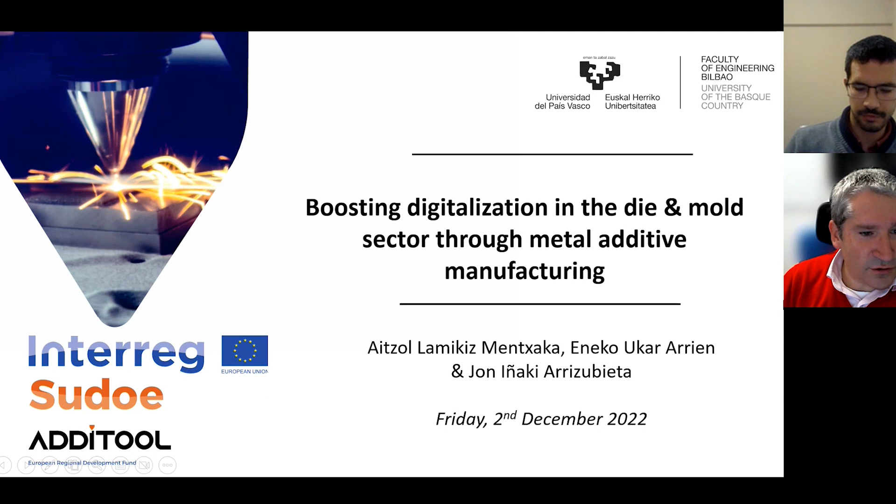So once we have finished the presentation, let me start. Here you can see the content of the presentation. We will start with a very brief presentation of our research group, and also a brief introduction of the metal additive manufacturing processes that we are researching. Then my colleague Iñaki will go on with the more technical aspects about the Die&Mold industry and the application of metal additive manufacturing, and we will try to finish with some conclusions. Please feel free to ask as many questions as you have, we will also be on the chat, so you can write your questions there. So please, Iñaki.

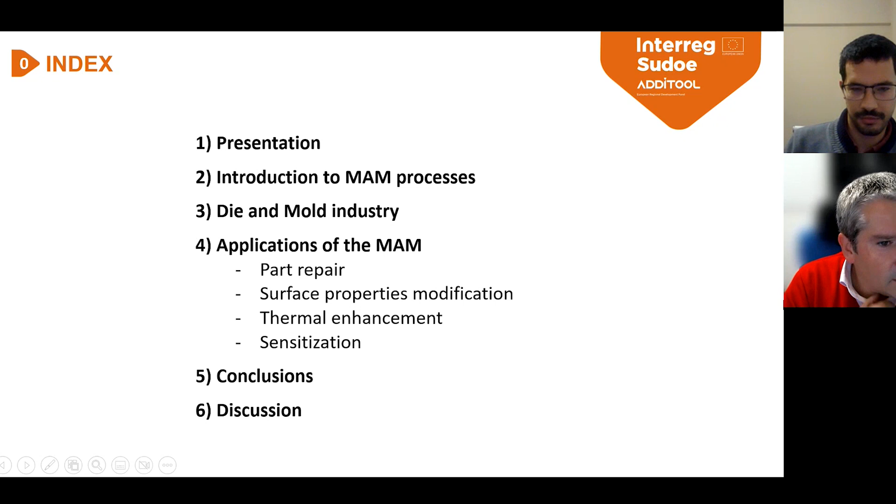We are from the University of the Basque Country. Our research group is the High Performance Manufacturing Group, which works in different areas: high-speed manufacturing, grinding, electro-discharge machining. Also, some years ago we started a research line in metrology and inspection, and we are focused on laser material processing, mainly additive manufacturing, laser welding, and laser texturing. We are in the Faculty of Engineering of Bilbao, working with students. We lecture in Bachelor Science, Master Science, and also PhDs, and we develop different TRL level projects, from quite basic to technological transfer projects.

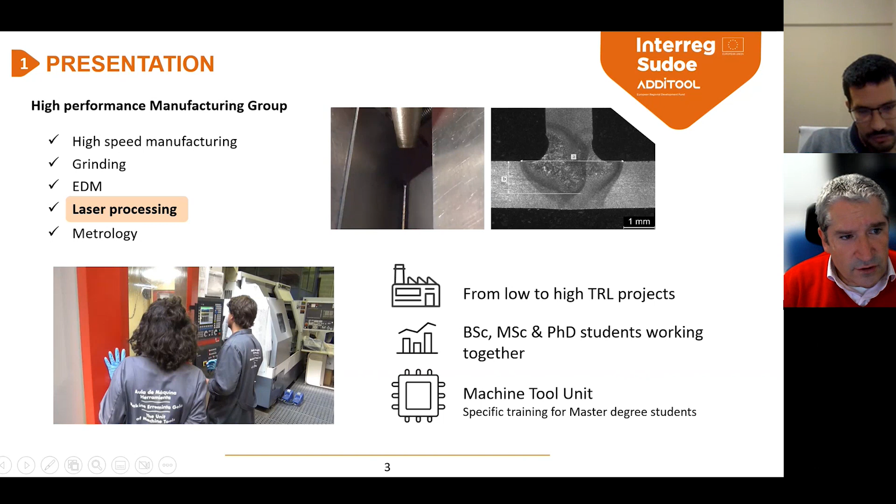We also have another workshop called the CFAA, Centro de Fabricación Avanzada en Aeronáutica, which you probably know. Here we also have some additive manufacturing systems; in fact, the laser powder bed fusion process that I will talk about later is located here with two systems. Here our projects are more high TRL level focused, we work mainly for companies but also develop some PhDs here too, so we combine both training and research activities.

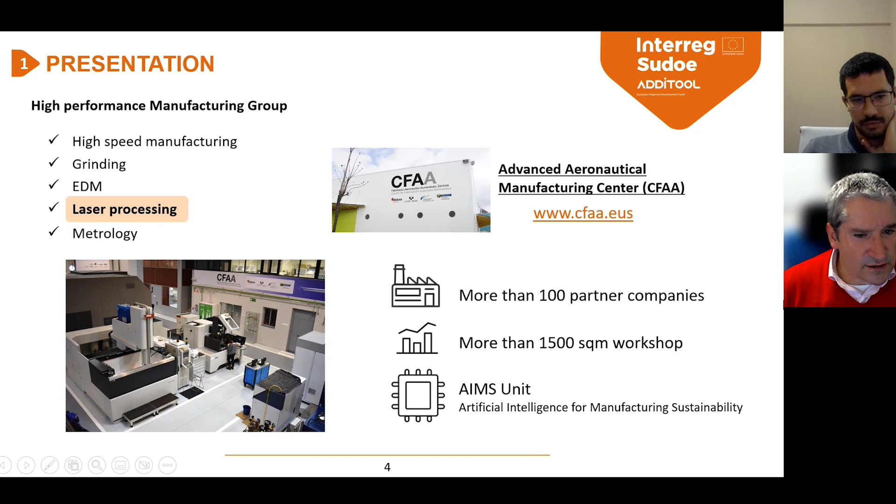Focusing on our research activities in laser material processing, the main technologies we work on are powder bed fusion and directed energy deposition, both metal additive manufacturing, plus some laser texturing and laser welding. Our main areas of research are process modeling, monitoring, control, CAD/CAM, and surface engineering, so any activities related to the manufacturing process. We are very focused on different sectors like aerospace, Die&Mold, automotive, and energy. More specifically, this webinar will be dominantly located in laser directed energy deposition, which is the main technique we have used here, and we will focus on monitoring and control, surface engineering, and some process modeling. Obviously, in the ADDITOOL project, the sector is Die&Mold, and some automotive.

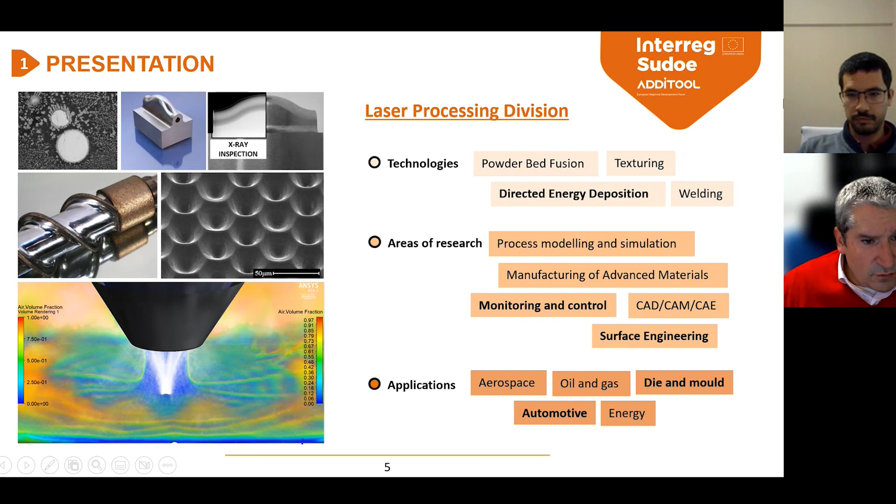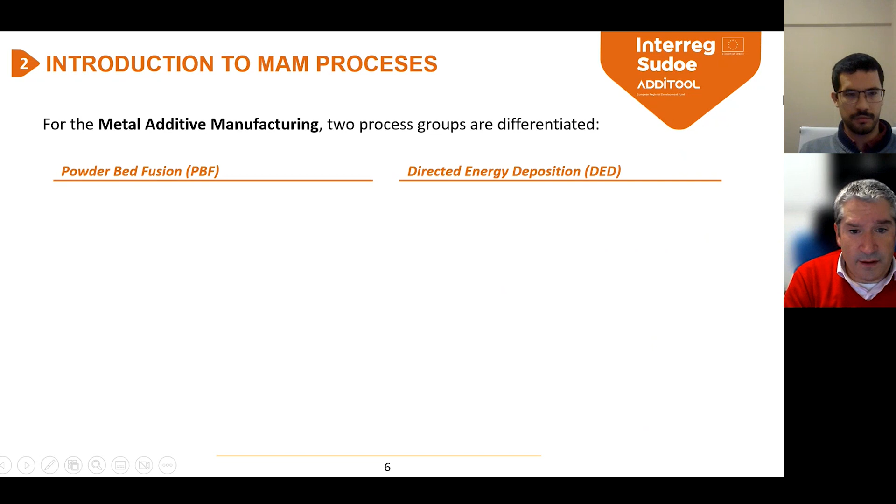Going to the introduction now, we have focused on two metal additive manufacturing processes, which are probably the main processes used for metal: one is powder bed fusion, and the other is directed energy deposition.

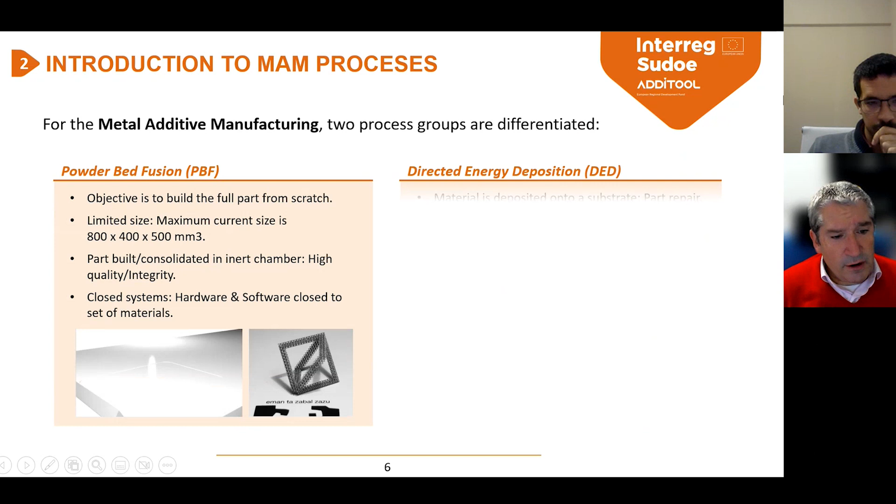Probably you will know them, but in short, powder bed fusion is used for building parts from scratch, from zero. The idea is to go layer by layer to build a full part. The process is carried out in an inert gas chamber, usually argon.

So here we have a first limitation of the process: since we have to insert the part into an inert chamber, the part size is limited. A very big powder bed fusion machine can be 800 by 400, 500 millimeters in height, but conventional ones are typically 300 by 300 in XY and 300 to 400 millimeters, which is considered relatively big for powder bed fusion.

On the other hand, we have directed energy deposition processes. In that case, the idea is not to build the full part. We start from a previous part, from casting or forging, and deposit material by injecting it onto a substrate. This process is very useful for coating a surface, even part repair.

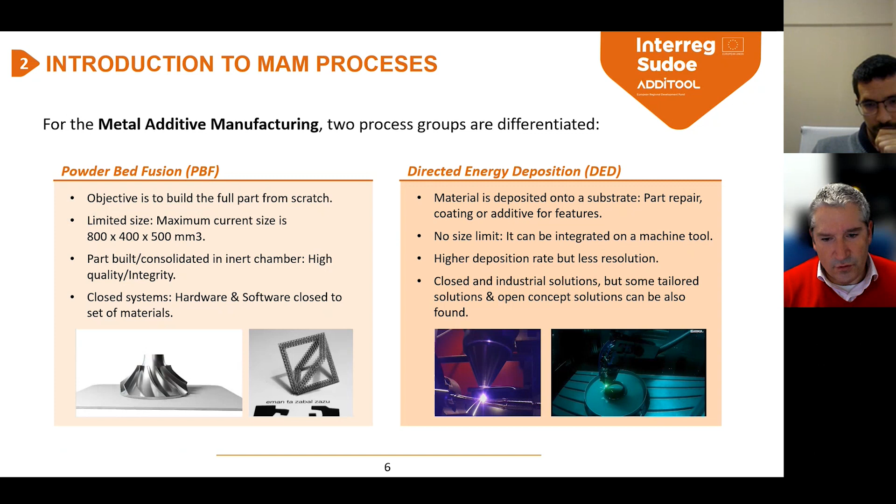Going more in detail into laser powder bed fusion, the idea is to go layer by layer using metal powder. The system spreads a powder layer. In that case, we use quite fine powder, relatively small, lower than 60 microns.

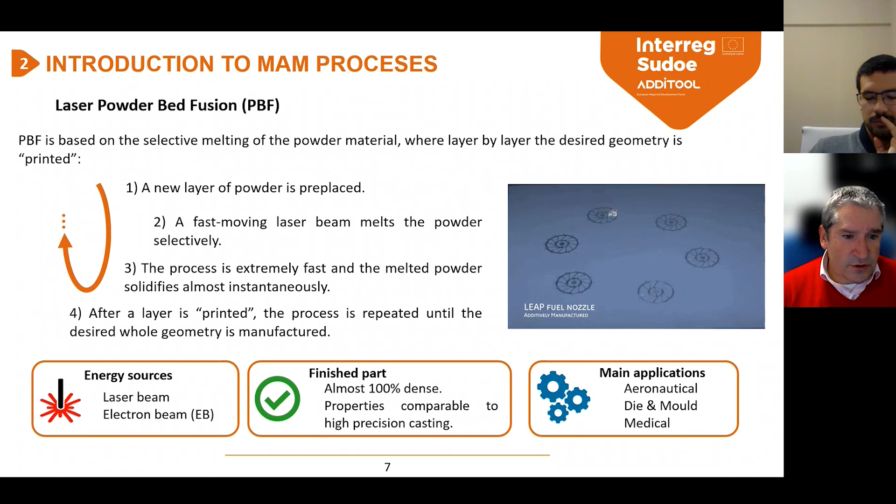We need to fill the whole plate with powder, and with an energy source, typically a laser, the laser melts the powder that will become the part. The melting and resolidifying of the melt pool becomes solid material. The process repeats layer by layer, in layers of about 30 to 60 microns, building a sequence of layers to form the full part.

The typical energy sources are laser beam, and there are also some systems that use electron beam. It's not so typical, but electron beam gives us a little more energy and goes a little faster using higher-grain powder. On the other hand, the resolution and finishing quality of the part are not as good, so both techniques coexist.

The process gives us a very good quality part if the process conditions are well selected, and we can obtain almost 100% dense parts, comparable to high quality castings. The main applications now are medical, for example dental implants. Aerospace industry is also moving fast, introducing this technique with a lot of developments. Die and mold is also one of the key sectors, since additive manufacturing is very good for complex geometries, internal cavities, and so on.

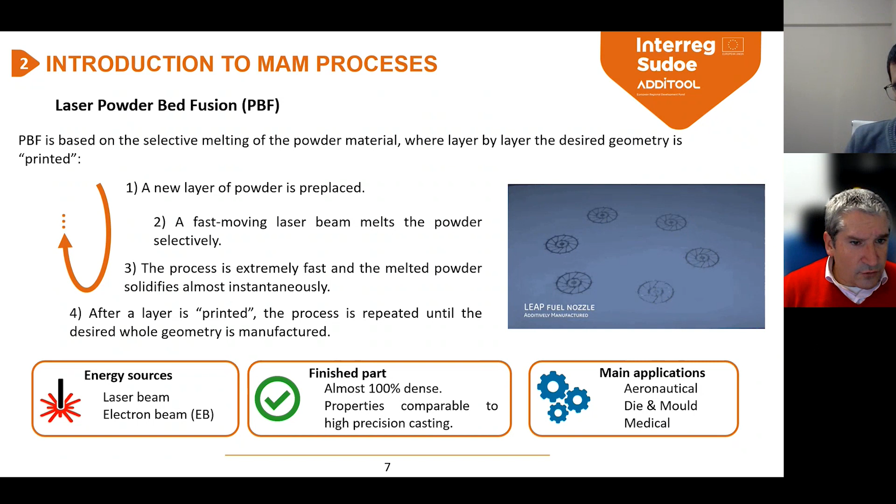On the other hand, the other process, directed energy deposition—here you can see in the video—the idea is that with a system, in this case a nozzle, we inject material. It can be both in powder or wire form, in combination with an energy source that can be a laser. We melt a substrate, a previous part, and then inject the material into the melt pool created in the substrate.

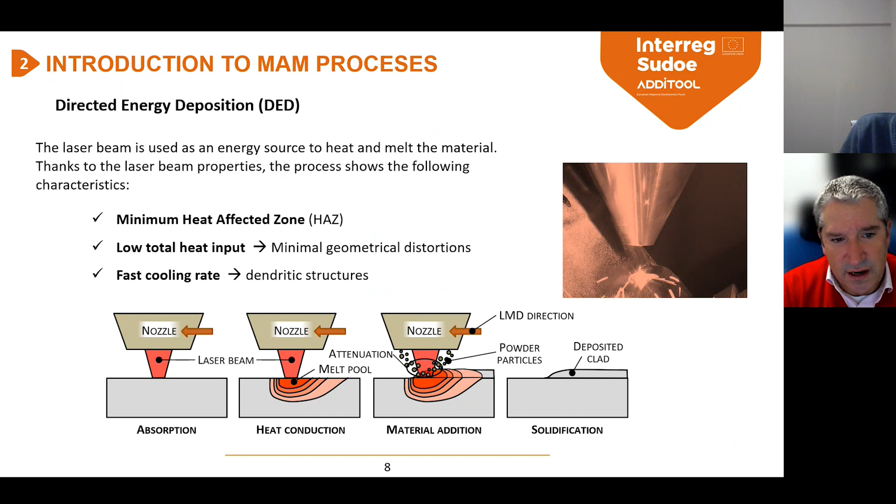So we can inject and deposit material in an area, and by overlapping the tracks of the material deposition in a layer, we can coat a surface, and even go layer by layer in order to build up material. Here you see an example of a layer by layer sequence that we have built as a feature.

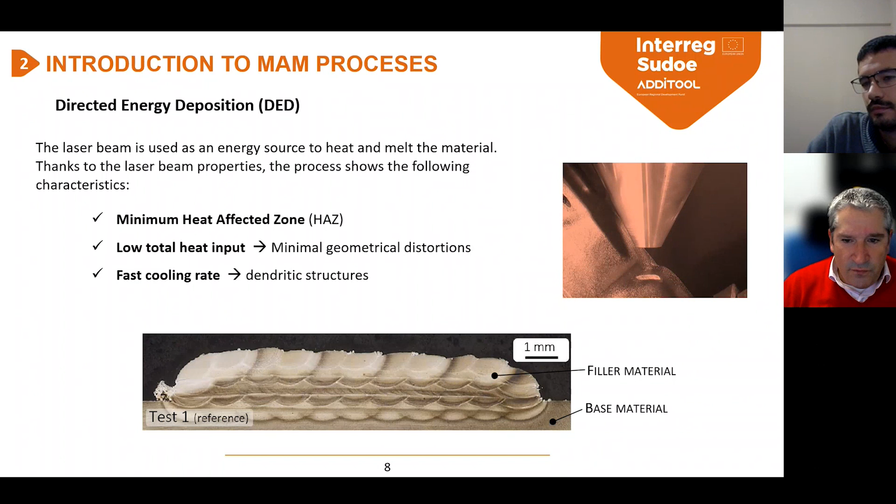In that case, the laser gives us very good quality in terms of having a minimum heat affected zone, and we can melt a very local area. So in that case, we have a very good resolution. And also, if the process goes with the correct conditions and good parameters, we can obtain a very full dense and very good quality in the deposition of the material.

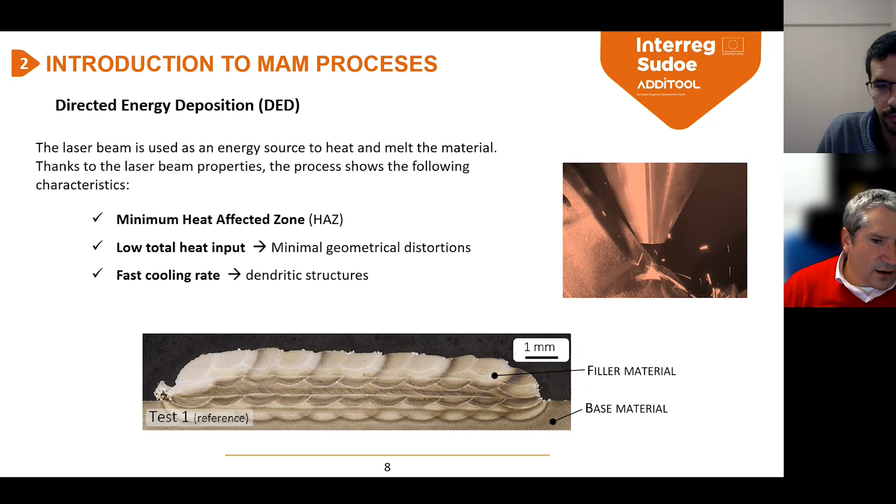So, just to finish that, in comparison, here you can see both techniques. On the first hand, the laser powder bed fusion, we have a relatively good accuracy, considering that it's a thermal process with metal fusion. We can obtain parts below 0.1 millimeters, so it's quite good. Surface roughness is also quite good, above 2.5 microns of mean roughness, which some people could consider not very good quality, but if we consider that it's a thermal process, it's relatively good. We obtain very good integrity in the parts because of the inert gas chamber.

On the other hand, we have some restrictions. For example, the building rate is not so high. We have 0.2 to 0.4 kilograms per hour, which is not so much. And on the other hand, we have size restrictions due to the inert chamber. So if we go to very big parts, it's not affordable.

And on the other hand, the laser directed energy deposition, in that case, we do not have so good quality in terms of surface finishing and tolerances. Here it's very difficult to obtain tolerances below 0.5 millimeters; 1 millimeter can be the process limit. Surface roughness is also not so good. So in this case, we will need almost 100% of the times to finish with further machining or grinding operations.

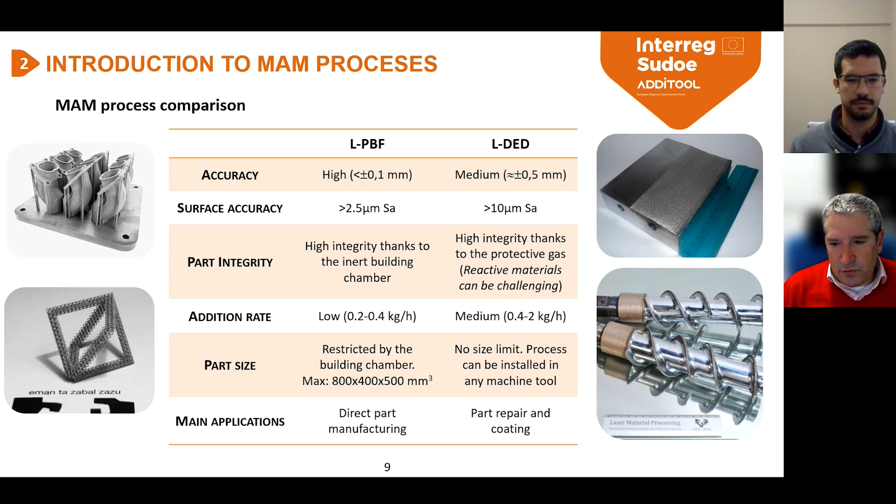In my case, I'm going to start directly talking about the Die&Mold industry. As you know, this is a sector formed by different processes like hot stamping, metal blank sheet stamping, and also forging. But in all of them, we can say as a common characteristic that a metal sheet is formed mechanically from an initial to a final shape, which is the objective of the process.

And somehow we have identified some typical problems in all those processes, which are wear problems because of the friction between the blank or the part and the tool faces. Also thermal issues in case of hot stamping because of the high temperatures developed during the process, which may decrease the properties of the tools or also generate abrasion problems. Also, for hot stamping, we have some design limitations due to the geometry of the cooling channels, which are typically manufactured by drilling, and somehow their shape is restricted, always straight. And finally, we have also identified a lack of process data directly in the forming area.

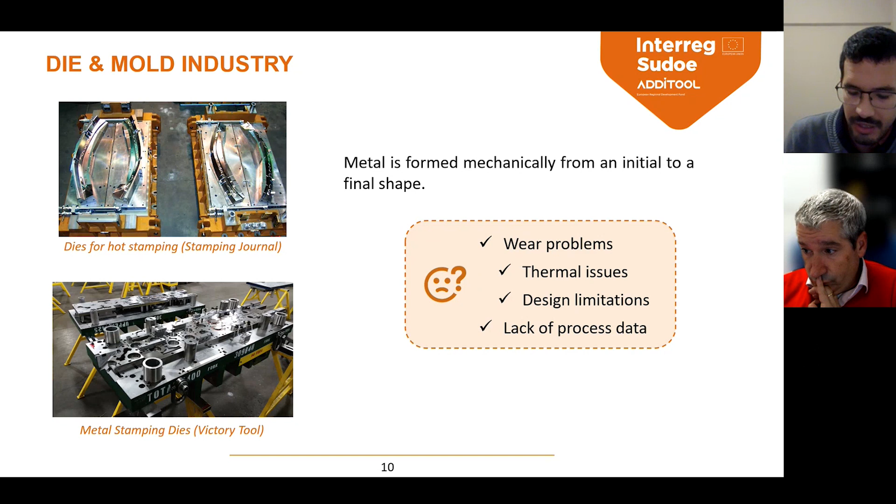We have also analyzed the actual state of the art of the Die&Mold industry, somehow what we expect from this sector in the near future. And we conclude that there won't be many changes, as all the Die&Molds will continue being manufactured by casting and machining. But we have also found that there are some useful applications for metal additive manufacturing that can make a difference in the process.

First of all, we need to highlight that the manufacturing process of a die is rather long. It starts from the design process. Afterwards, we have to cast the material. Afterwards, machine it, and that process can take a couple of years.

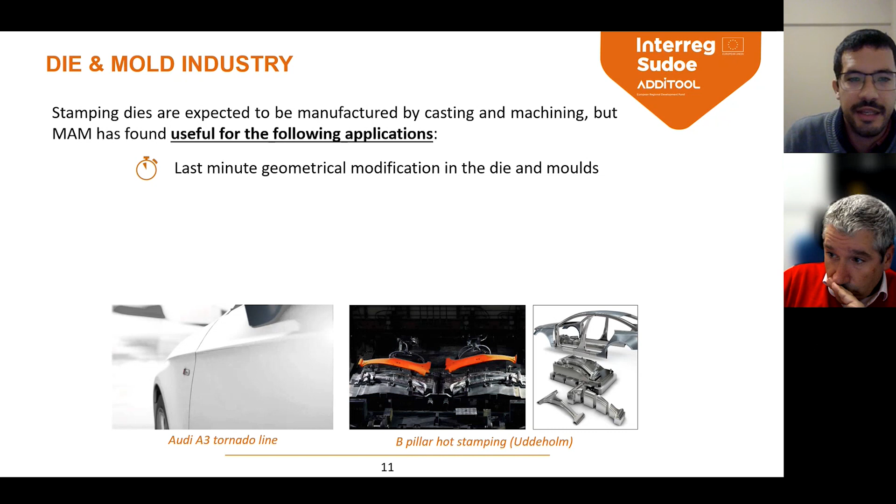During that process, any geometrical change of the tools or the design of the car can also change the shape of the active faces of the tools. In case that modification implies adding material, we will have huge problems in terms of cost and time. So additive manufacturing can add these geometrical details and save a lot of time and money for the industry.

Also, critical areas that suffer wear problems could be repaired by additive manufacturing. Any error during the machining process, like a tool that breaks during milling or a wrong program trajectory, could be corrected by additive manufacturing. Finally, during the adjustment process, which is usually done manually by removing material, if instead it's required to add material, additive manufacturing could solve these problems.

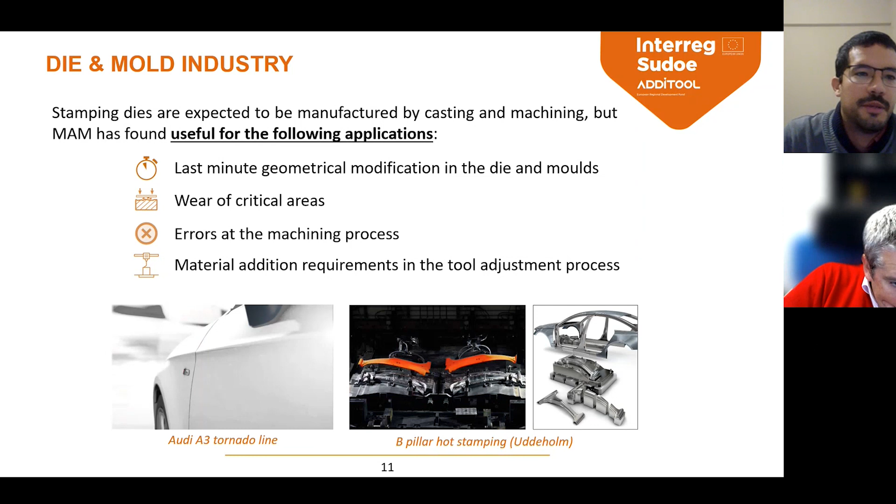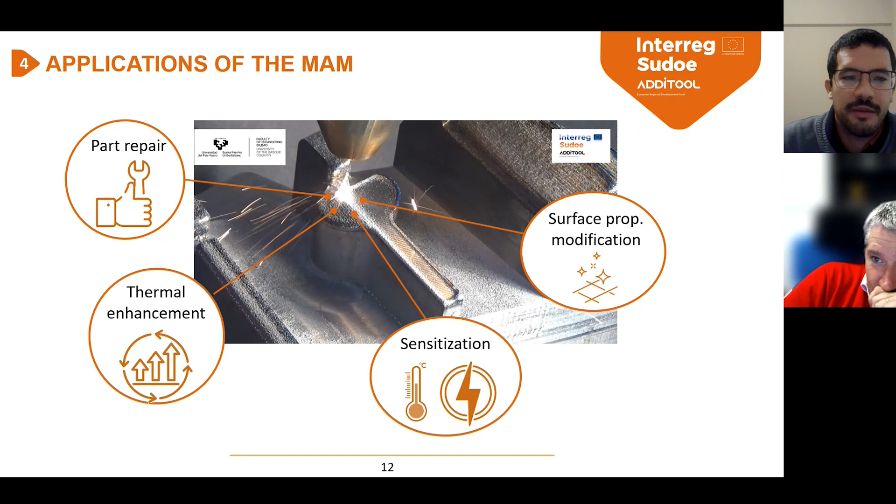Once we identified the possible applications of additive manufacturing for the metal industry, we focused on 4 cases: part repair, thermal enhancement, sensorization of the tools, and surface properties modification. In the next slides, we are going to show you a couple of examples of these applications that we worked on in the ADDITOOL project.

The first of them, part repair, presents different opportunities. On the one hand, the most logical one is that metal additive manufacturing can repair a damaged or worn surface, extending the lifespan of components, which helps achieve sustainable development goals.

On the other hand, we can also manufacture what is called a bimaterial tool. Instead of building the whole stamping tool with the same good, hard, expensive steel, we can combine two steels: one cheap and easy to machine for the bulk, and then deposit a layer on its surface to increase the properties and ensure proper working of the tool.

And also, the final opportunity offered by metal additive manufacturing is the last-moment geometry modification, about what I have already told you before.

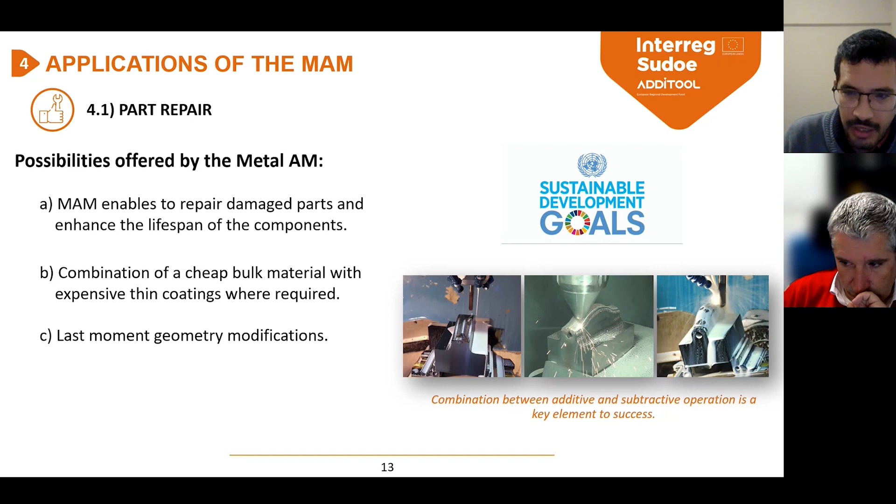So, to give one example for part repair, this is a case study we manufactured within the ADDITOOL project. This is a clamping device in which we position a stamped part, and we use it to check whether the stamping process has been properly manufactured.

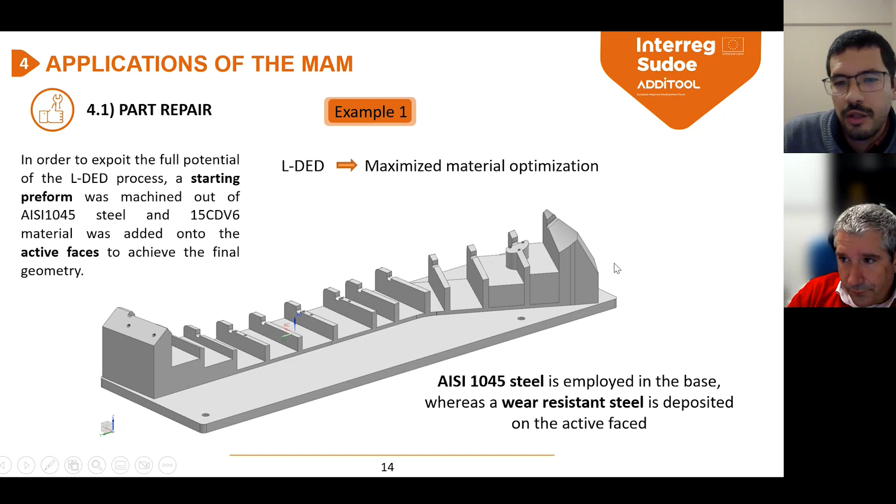Traditionally, this part was built in 15CDV6, an aeronautical steel, quite expensive and not easy to manufacture or work with. Instead, we tried a new strategy: building the base in AISI 1045, a common, cheap, easy-to-manufacture steel. Then we eliminate 1 millimeter of material in the active surfaces and fill it with the good 15CDV6 material.

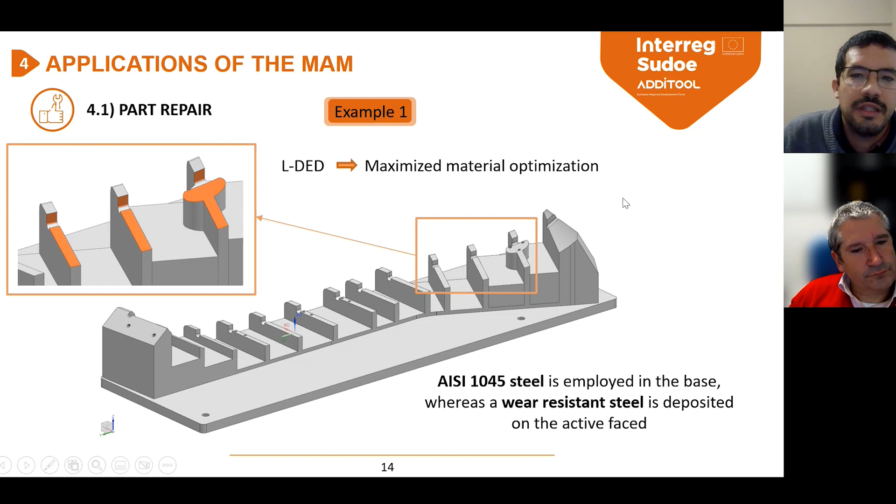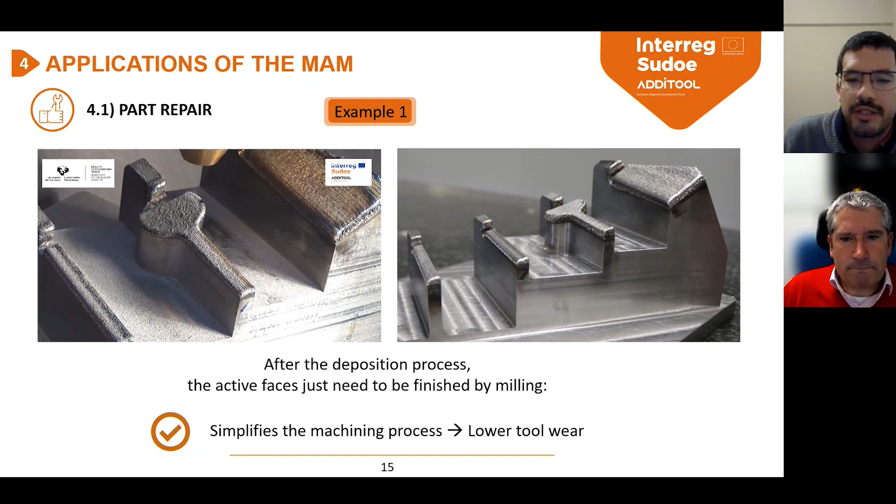On the image on the right, you can see the final shape of the repair tool. One of the main benefits of this strategy is that the final machining process only consists of some small areas, which simplifies the machining process and also lowers the tool wear it suffers.

The second application is related to surface properties modification. Traditionally, when we think about the additive manufacturing process, we always think of the filler material, which in the present case is in powder shape. We introduce this material into the powder feeder.

In our case, it's a gravimetric powder feeder. We introduce the powder inside, it falls down thanks to gravity. We have a rotary plate, and by controlling the velocity of rotation, we control the feed rate of the powder that comes from this pipe to the nozzle, and we inject it into the melt pool in order to obtain a clad made with material A.

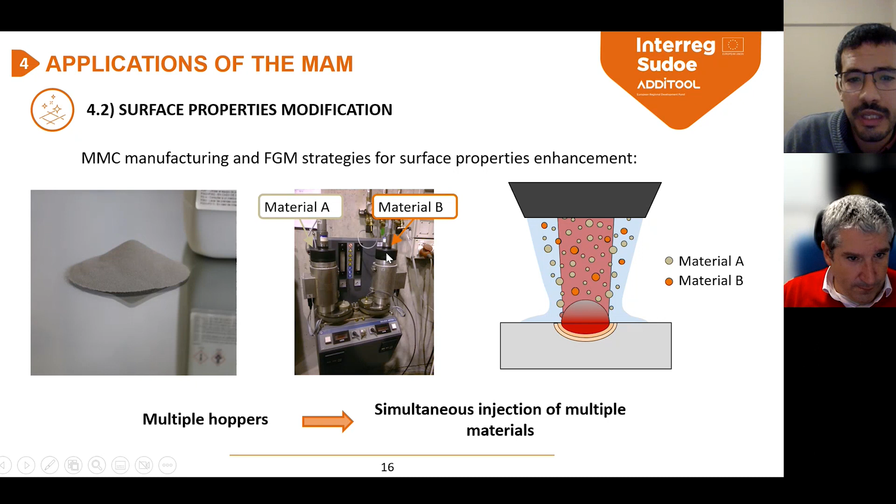However, in metal additive manufacturing, we can combine different materials to obtain what is called a metal matrix composite. In this case, we add two materials simultaneously, and the clad consists of a combination of both. Moreover, we can control the feed rate and ratio of each, building what is called a functionally graded material, controlling the chemical composition of the clad and varying it in every layer.

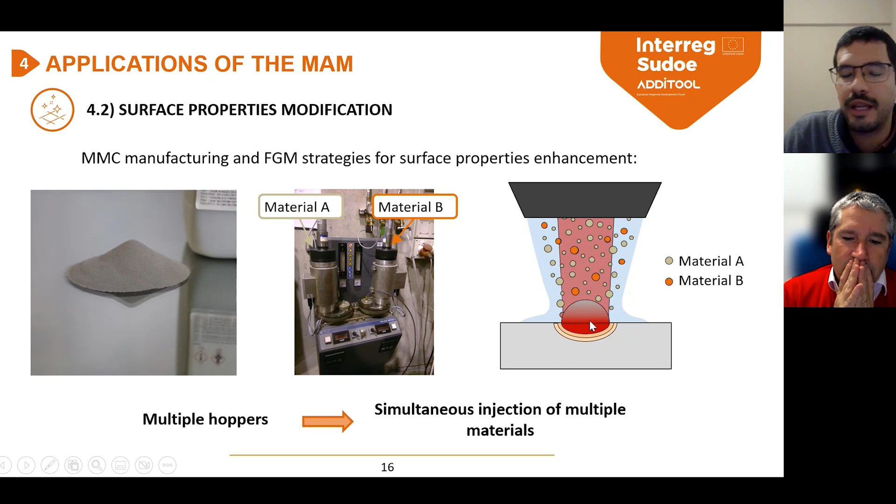In order to show you an example of this metal matrix composite, I can show you a couple of pictures of a Stellite 6 and tungsten carbide deposition. The Stellite 6 is a cobalt-based, wear-resistant alloy.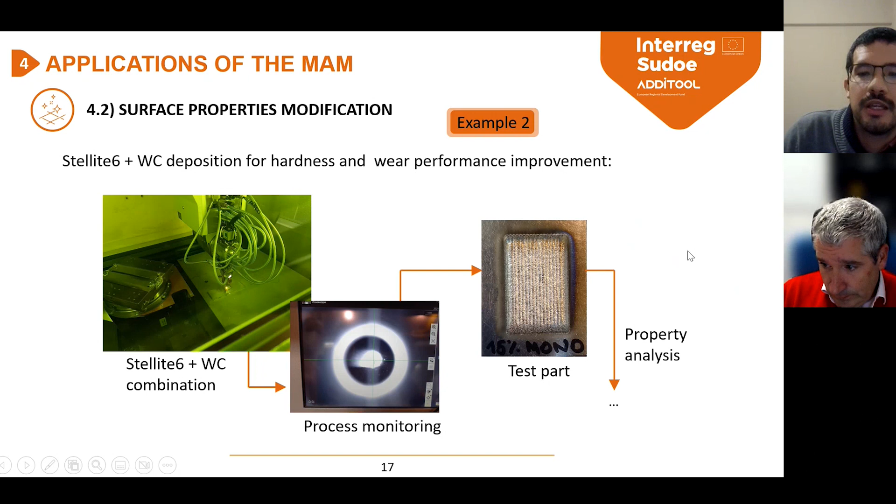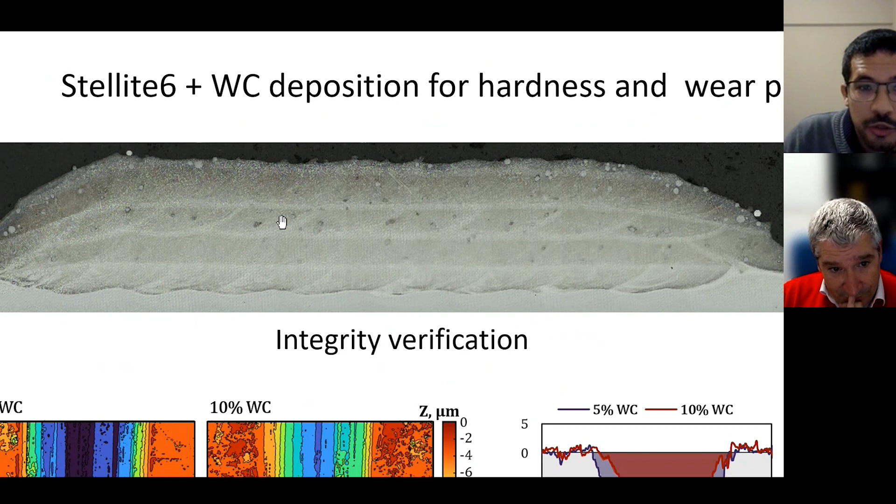In this case, we performed the test in the CFAA, the High Performance Center I told you about before. We build small test parts and analyze them. First of all, we perform an integrity verification. As you can see in this picture, we have the Stellite matrix, which is the metallic matrix, and the discrete tungsten carbide, which are ceramic particles embedded or introduced inside the clad.

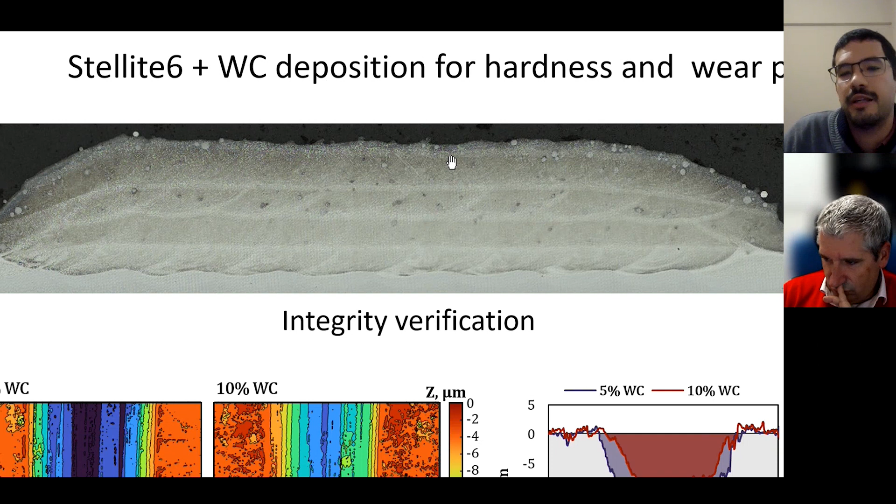This test was performed using the FGM strategy, because we vary the composition of each layer. First we start adding only Stellite 6, then we introduce also 5% tungsten carbide, 10%, and in the last layer we can go up to 15% tungsten carbide and 85% Stellite 6. That way we avoid crack problems and increase the resistance of the coating.

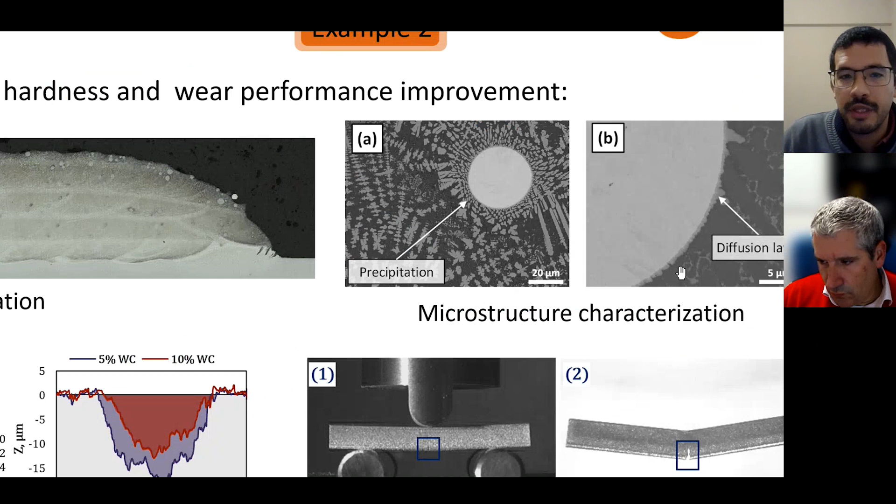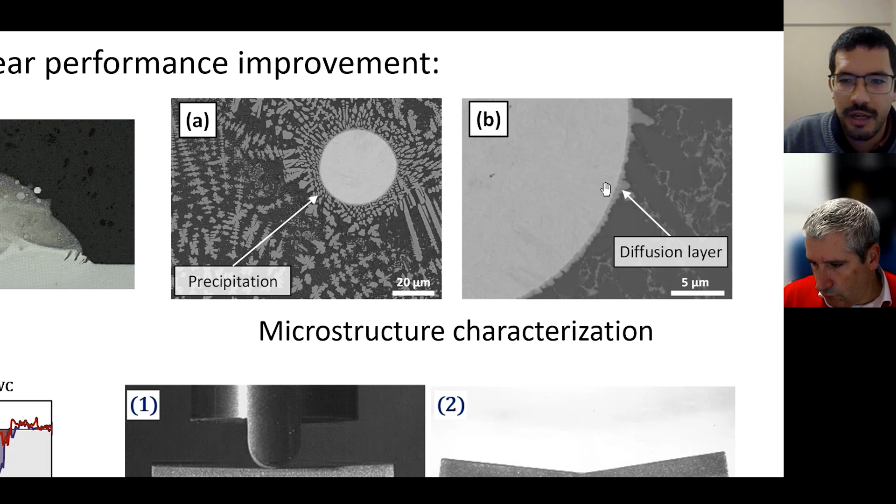Also, as we have a metal matrix composite, we perform an evaluation of the bonding between the tungsten carbide particles and the metal matrix. As you can see in the right figure, there is a small diffusion layer, but it's so small it doesn't affect the properties of the Stellite 6 matrix. This diffusion layer also ensures proper bonding between the tungsten carbide and the metal matrix. So once we have ensured the integrity of the clad, we have analyzed the performance.

Both mechanically, through the three-point bending test, and also the wear performance of this clad. As you can see in this figure, increasing the tungsten carbide percentage implies higher resistance to wear problems, which is really interesting, for example, in the tool and die industry.

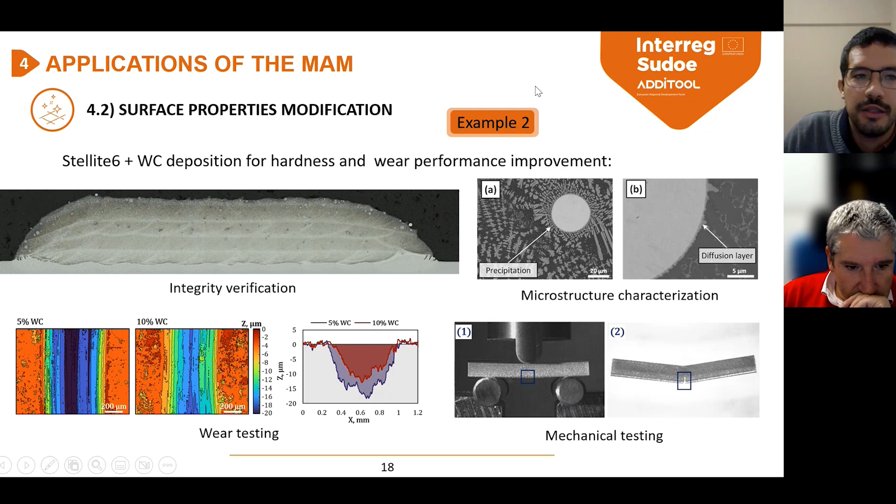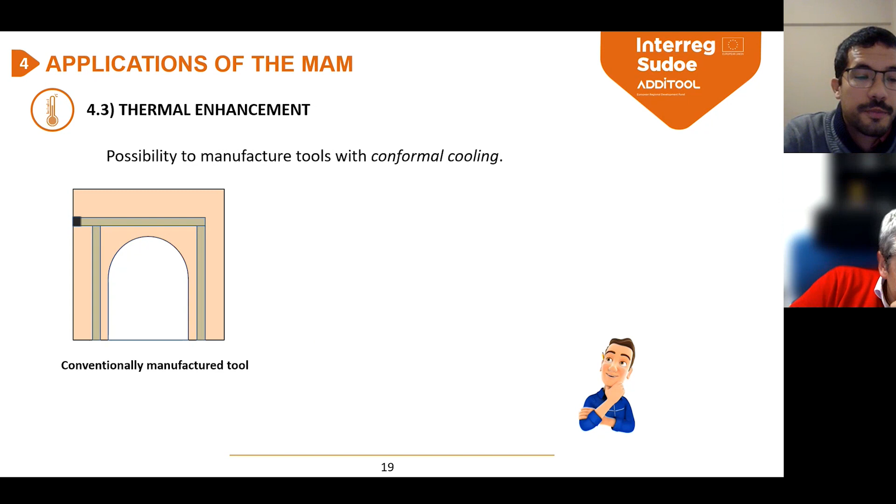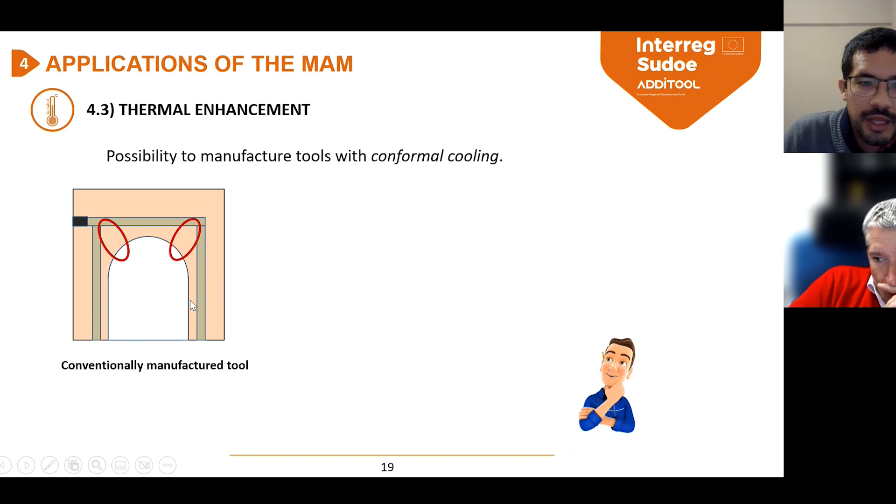The third example we are going to analyze is thermal enhancement. In this case, if we want to manufacture a hot stamping tool steel, we need to manufacture via drilling the cooling channels, which are always straight shaped. This implies that the distance between the active face, the inner line here, and the coolant channel is not constant, and we will have hot spots where heat is not extracted, as well as areas where the drilling hole is close to the surface.

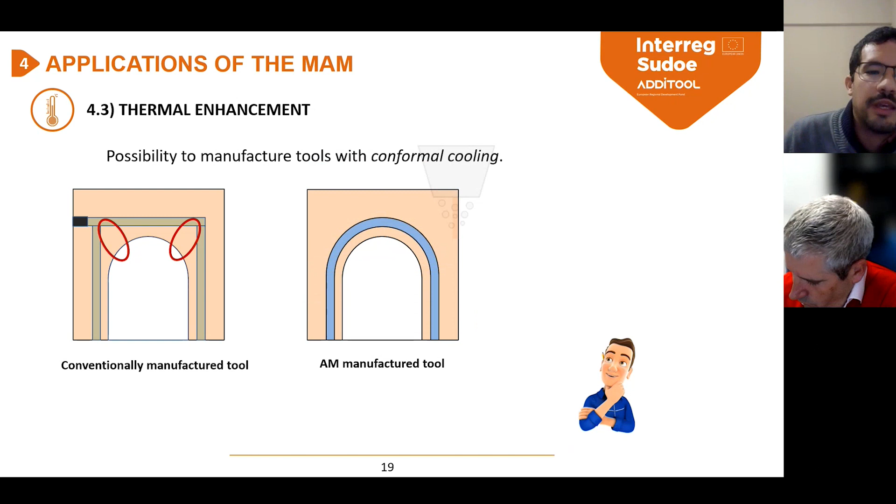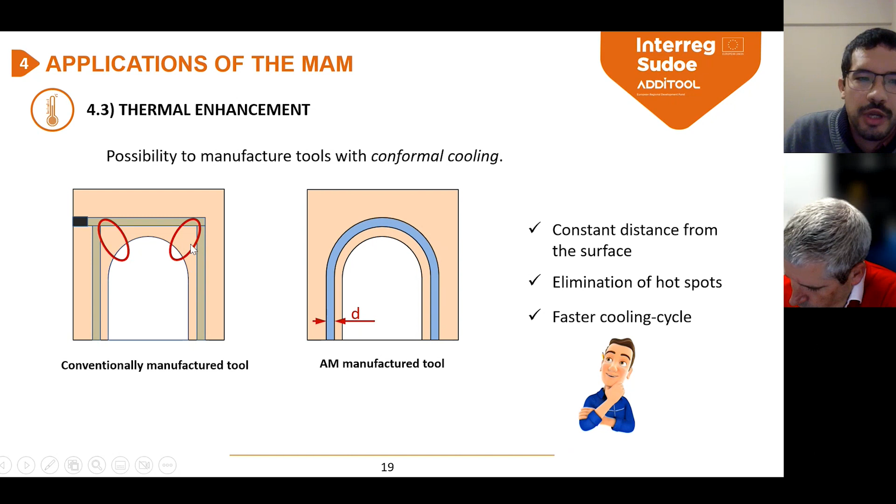So in this case, thanks to the additive manufacturing process, we can manufacture a cooling channel which is always at a constant distance from the surface. We eliminate the hot spots we talked about before, and also obtain a faster cooling cycle. To show this feature, I'm going to share the results of thermal simulations we ran with the software ANSYS.

The first case corresponds to the straight drills, and we analyzed the behavior of the tools and the cooling cycle of the metal sheet being stamped. As you can see, there are hot spots where heat extraction is lower than the rest of the blank. We designed new cooling channel systems based on additive manufacturing capabilities, and we are going to analyze the differences between the straight drilled and conformal cooling channels.

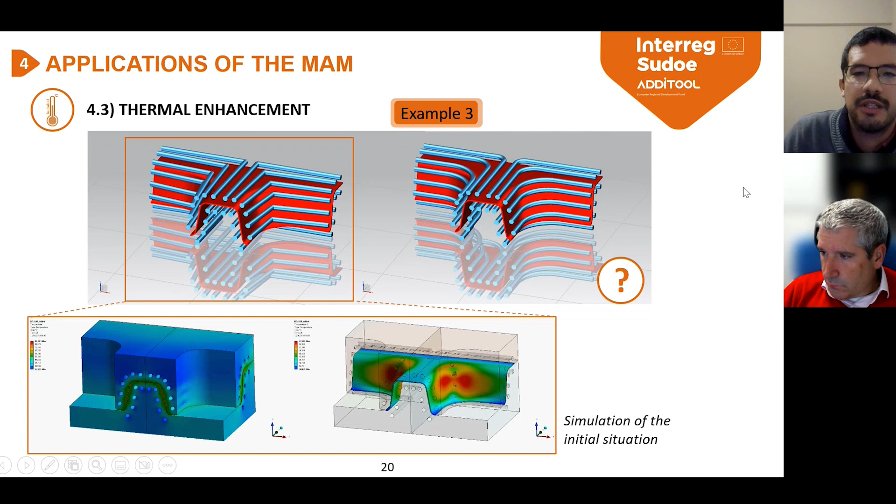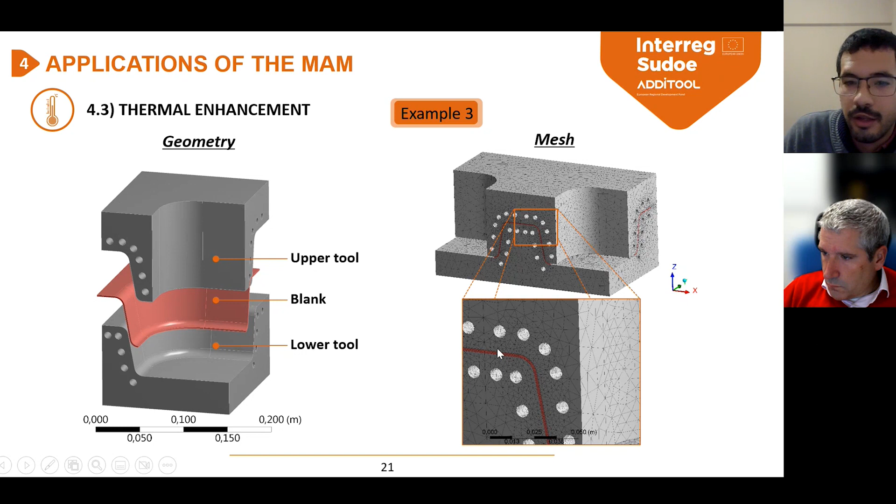For this purpose, we designed the upper and lower tools, as well as the blank geometry. We performed meshing in order to refine the element size in the areas close to the contact regions and the cooling channels. We introduced the boundary conditions, and here we can differentiate two operations: first the stamping and quenching operation, where we have a hot blank in contact with the tools and we extract heat through convection.

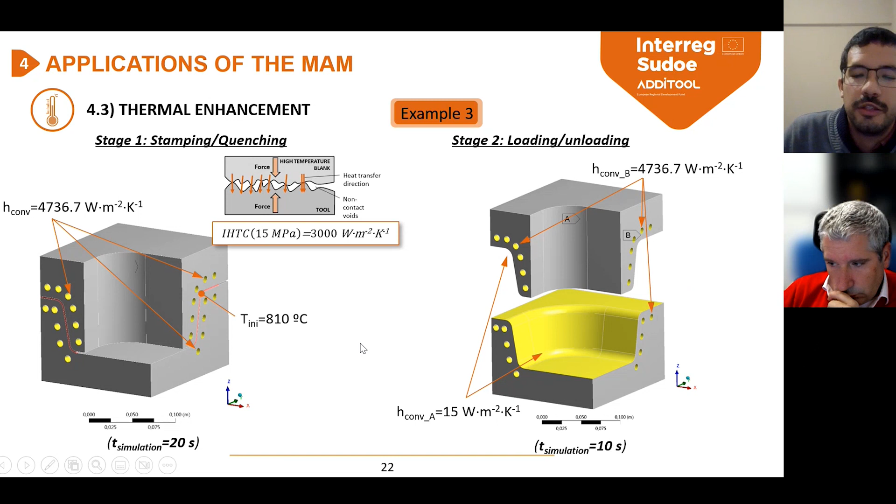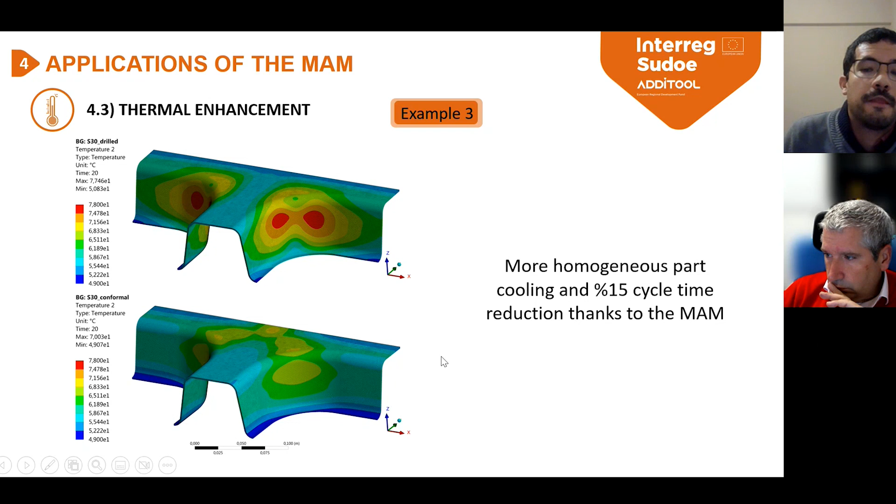The second stage corresponds to the loading and unloading operation of the blanks. In order to obtain a stable regime, we perform 30 consecutive stamping operations. Here you can see the results comparing the straight cooling and conformal cooling. Thanks to metal additive manufacturing strategies, we can save up to 15% in cycle time.

The final application corresponds to the sensorization of the tools. As I introduced previously, extracting information from inside dies and molds when they are closed is quite complex, mainly because when we introduce a thermocouple, for example, we also affect the thermal behavior of the tools. But obtaining this information is necessary in order to digitalize the manufacturing process, and we think additive manufacturing is one of the key factors to achieve these objectives.

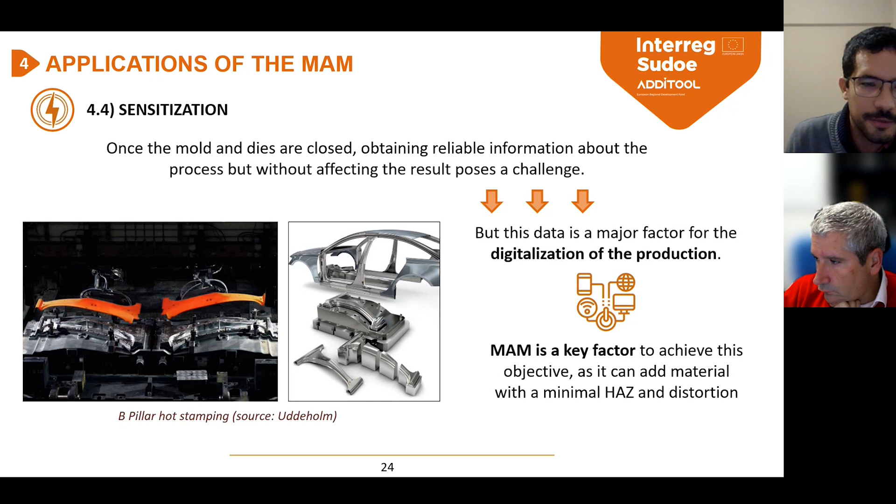To show the capabilities of metal additive manufacturing, we are going to show some results obtained in a parallel project to ADDITOOL, called SUSI, financed by the Basque government. In this case, we introduced a thermocouple inside a hot stamping tool. The main difficulty relies on the fact that we are adding material on the sheath of the thermocouple, which is really thin.

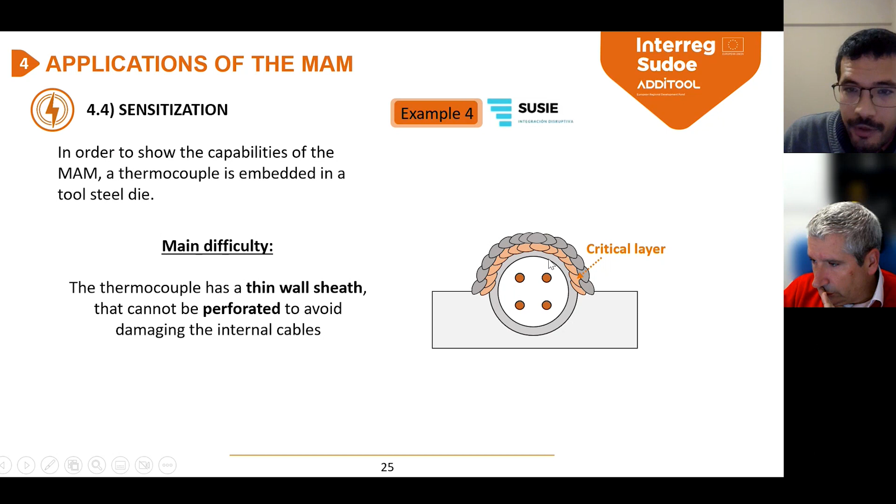In the cases we used, we performed a benchmark of the different diameters of the thermocouples, and we were able to embed even up to a 3 millimeter diameter thermocouple, which implies a 0.3 thickness coating on its surface.

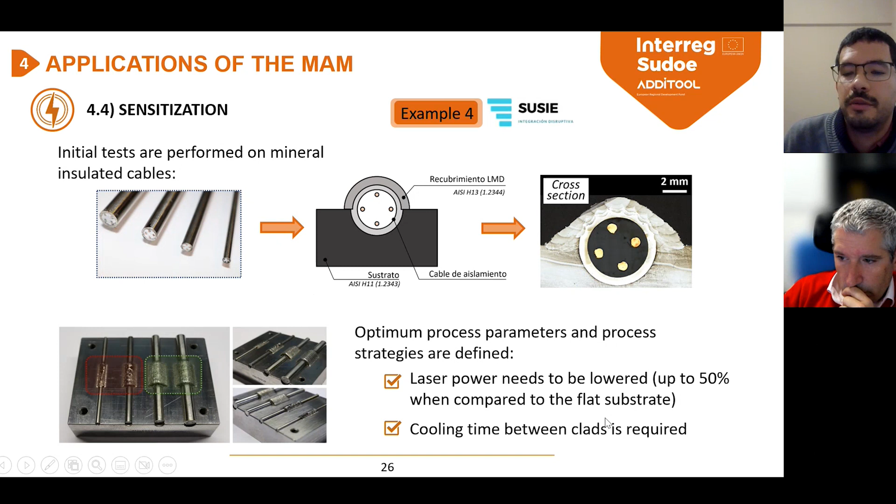Here you can see the results we obtained. We conclude that in order to add material over the thermocouple without damaging the sensor, we need to lower the laser power by up to 50% compared to when adding on a flat surface. Also, in order to stabilize the process, because heat dissipation in the thermocouple is rather small, we need to include cooling time between the different clad depositions.

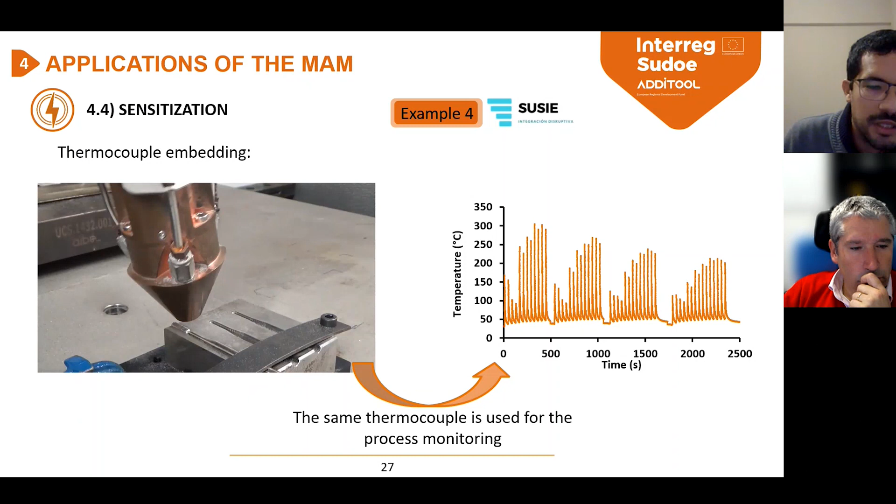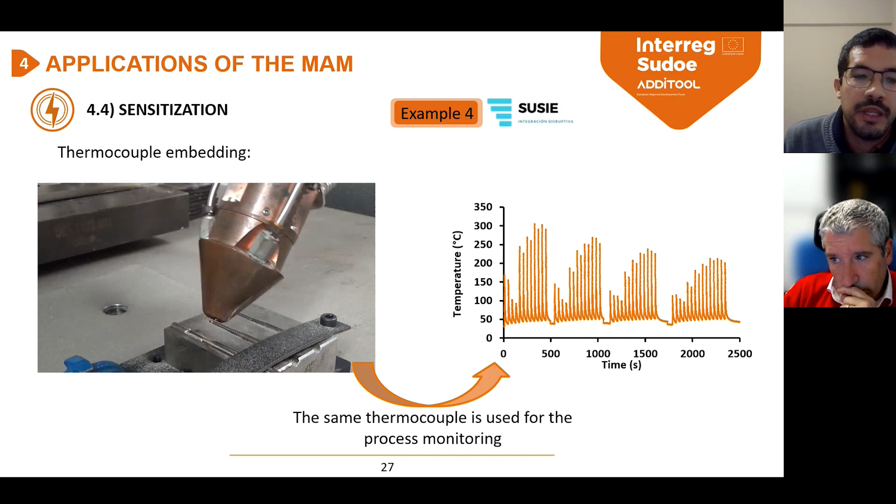Luckily, we can also use the same thermocouple for monitoring the process. As you can see in this video, while we are depositing material on the thermocouple, we measure the temperature, and we obtain two benefits: we can control the cooling time so we know when to start depositing the next line, and if we damage the thermocouple, we will also notice it in the temperature measurement.

Also, the mechanical properties of the laser additive manufactured materials are ensured because we deposited AISI H13, which is a hot stamping tool steel.

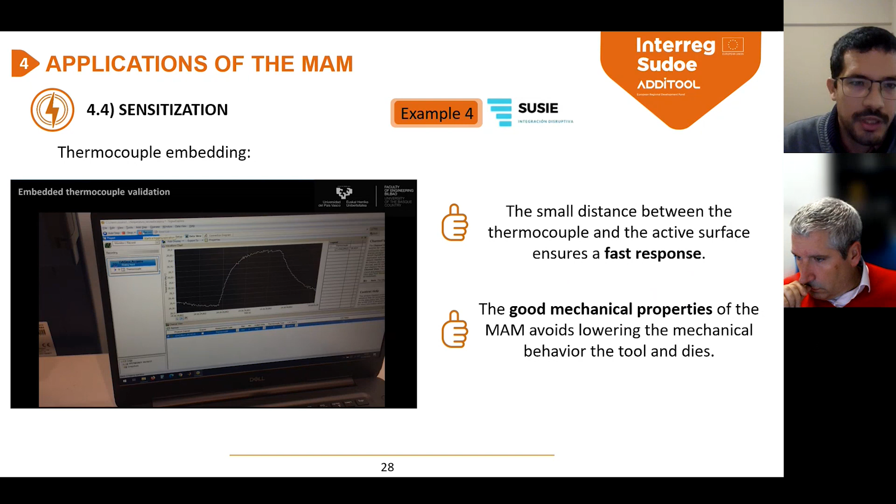So in order to sum up this presentation, I'm going to briefly introduce the conclusions we obtained. First of all, thanks to metal additive manufacturing, we can repair worn or damaged dies so that we increase the lifespan of these components.

Also, we can manufacture bimetallic stamping tools thanks to the coating of cheaper materials, which results in a cost reduction. Also, thanks to the free-form manufacturing capabilities of additive manufacturing, we can obtain conformal cooling channels and reduce cycle time.

Also, thanks to the capability of additive manufacturing to combine different materials, we can manufacture metal matrix composites, improving the wear properties and also the hardness of the tools. Combined with this, thanks to functionally graded materials, we can develop new materials and also combine materials that originally were not compatible.

And finally, we have successfully embedded a sensor in a hot stamping tool, so we can improve Die and Mold monitoring systems.